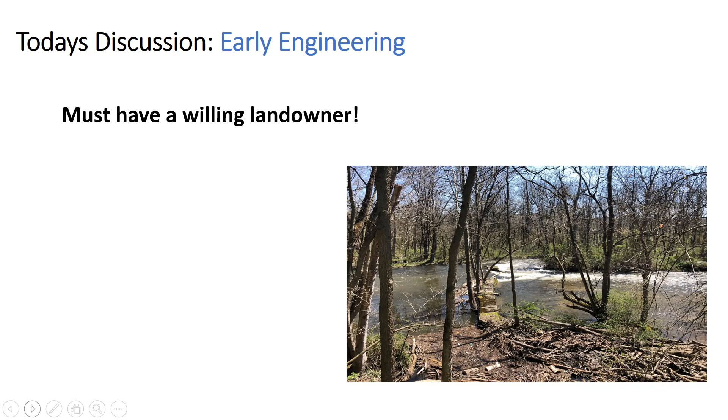Today's discussion, as mentioned, will focus on the early engineering phases of a project. First and foremost, you must have a willing landowner. You can't move forward with any of your projects unless you have a willing landowner that is interested in removal and actually wants you to pursue removal on their property. Some of the big components in the early stages of these projects involve lots of data being collected and lots of field surveys that your engineers will help with. They'll also help perform desktop research, and we'll get into the different components of that research and the surveys today.

I'll give an overview of some of the engineering data that's being collected that feeds into and makes up the engineering design plans. Once we have those engineering design plans, we can get into the permitting process, completing those permit applications. So everything we talk about today builds up to those permit applications and understanding the components that go into them.

I do want to note upfront that not all of these dam removal projects are the same. The actual structures aren't the same size, the amount of sediment behind the dams isn't the same, and where they're located in the landscape isn't the same. So there are nuances to these projects, and I've done my best to highlight where those differences will be, giving a broad understanding of what information is collected and parsing out where, if this, then that, is going to happen. Not all of this information is collected for all removals, but this is a good mix of the big buckets of work expected to happen.

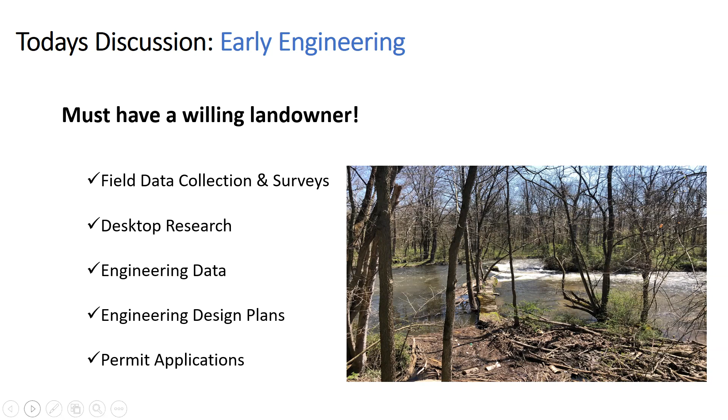So getting started with your project, you have a willing landowner. I always say it's good for you personally to get to know the site and the property, as well as other adjacent property owners in the area. In addition to the engineers knowing the site, it's good for you as the project manager to know it too. The permitting process can be pretty daunting and long, but it's always good to get ahead of it by reaching out to our regulators early and often.

This is very New Jersey centric, so I know there are folks joining from other geographies, but the permits we'll go through today align with New Jersey regulations and rules. A lot of the permitting agencies are pretty similar throughout the states here in the US, but I want to highlight that all the different permits I'll be talking about are Jersey-based. In New Jersey, we have an Office of Permit Coordination, which helps connect you to all the regulators that you may or may not need for your dam removal project.

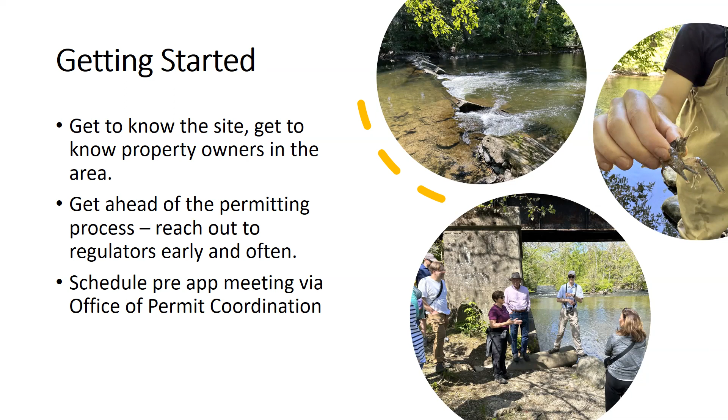So you can get on that schedule and schedule that pre-application meeting as early as a few weeks or a month. Really, you just need some data. We'll get into that in a few slides, what you need for that pre-app meeting, but wanted to note that you can get on that schedule pretty early, and the state of New Jersey makes it very easy because they have a one-stop shop to contact to get on that schedule.

So if applicable, if you have a dam removal that's publicly owned or in the center of a town, something that your engineer can help with is hosting public meetings. It's always good for you, as the project manager, to be there as the relationship builder, but it's also good to have that technical person in a public meeting.

Oftentimes these projects will generate a lot of excitement in the community. And if you have a dam that's in the center of town, you may have folks that have questions about the removal. So it's always good to get ahead of the game and really have your public meeting early on.

Now, if you have a privately owned dam, you wouldn't necessarily need to host a public meeting, but you would be able to connect with the landowners by either door knocking or leaving notices, though it would be on a much smaller scale than a publicly owned dam.

So first up, your engineer is going to have a lot of things to do. This first couple of slides are focused on the field data collection and the different surveys your engineer is going to work on. First and foremost is reaching out to research the deeds.

You can acquire the deeds at the county clerk's office or obtain those public records. And then what you're going to need to do, not you as the project manager, but you as the engineer, is plot the deeds for accuracy in the field.

You can see here roughly what the deeds may look like. Once you have your property boundaries, where you're actually, what the block and lot is, then you need to take it to the next step and start to look at the features in the landscape.

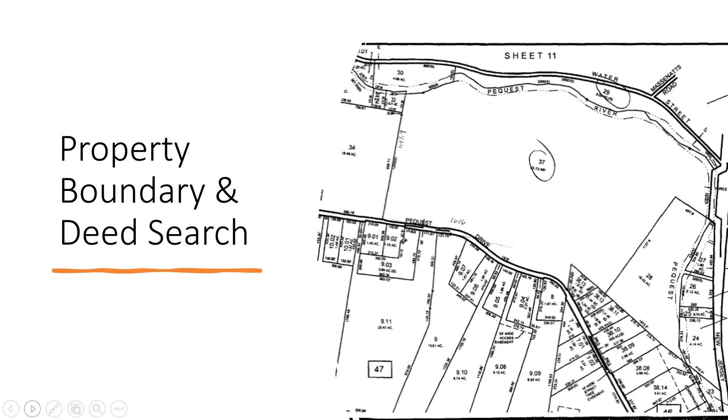Really what your engineer is trying to do is put together your proposed conditions or existing conditions in the landscape. So you document through your topographical surveys, another survey they'll do where they document everything in the landscape - your hills, your buildings, your road crossings, your storm drains. Those topo surveys are where they're plotting all of that on a map.

And then you would take it the next step, looking in the river. Through those bathymetric surveys, this is where they're measuring the depth of the water body, and it allows us to map the underwater features of that water body.

This information can be used for developing those contours of streams and reservoirs. This also allows us to see maybe where the buildup of sediment is on that stream bottom. So really it's just documenting those depths within the channel.

You can see here on the screen, this image I pulled from USGS, which has a ton of information on usgs.gov. This is just one of the fancier ways they collect that information on the contours of the stream, but there are many different ways to collect this data.

I do want to note that if you ever have a question about what your engineer is collecting, just ask them. All of this information I'm presenting today is really going through the things that I've learned through working with engineers on our projects.

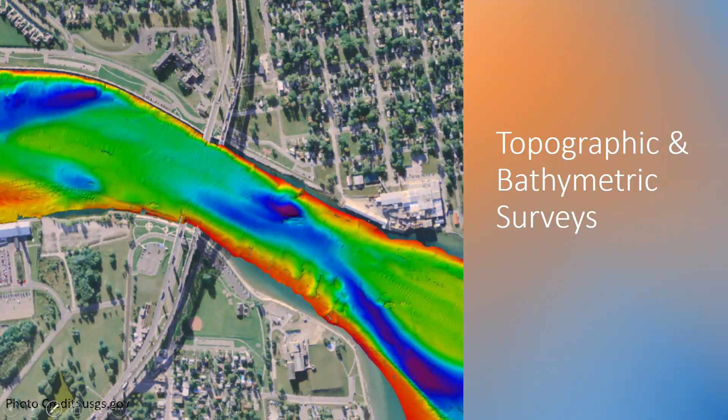It's always good to have the knowledge and information of what they're doing and how they're collecting this information, because some of the things we're going to get into I find to be a little bit more technical and a little harder to understand.

But as a project manager, you always need to present this information to your landowners, right? So having even just that high-level understanding of what a longitudinal profile is, is really helpful. I think the easiest way to think about these longitudinal profiles that are collected is thinking about the river as a whole system.

From the headwaters out to the confluence, we're really trying to understand and put to paper the characteristics of that river system. What the Long Pro allows us to do is see and characterize the average slopes and the different ranges of gradients, the different ranges of pools and scour depths, and the stability of different grade controls.

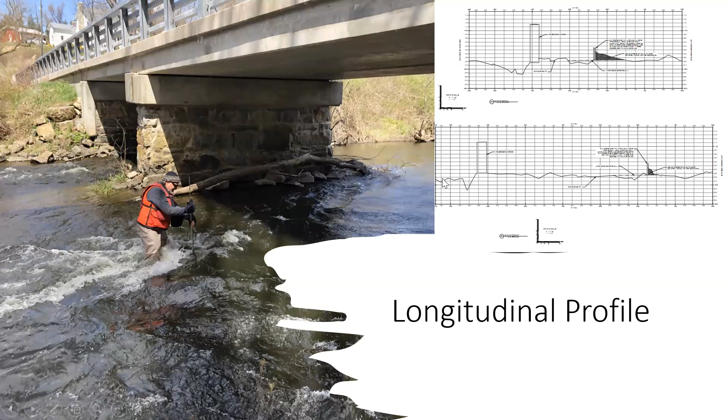They're also going to perform cross-section surveys, and this is what your cross-section will look like on the map. This is a survey that's performed at different portions of your stream reach that you'll be working in. The cross-section survey allows us to determine river flow at these specific transects.

You want to collect this information at points in your survey reach that are representative of that reach. If you have a bridge crossing, or you can see in this photo different channels, you're going to want to make sure that you have a cross section here, where there's going to be different flows. You want to make sure you're representing the flow rate throughout that whole channel, and you can do this via the cross section surveys. The extent of your cross section surveys is very site specific, project specific.

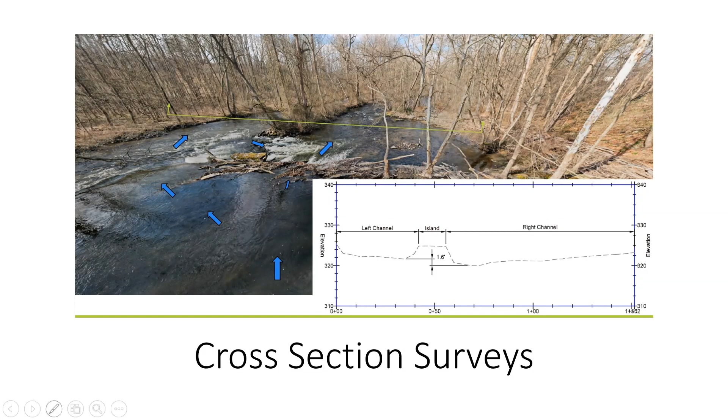Another component of that early field data collection is wetland delineations. In accordance with the Army Corps, they have standards for our wetlands, and it's required through the permitting process to delineate your wetlands. Anywhere you're working that you're going to have equipment, or you're going to be moving things around near a wetland, you need to delineate where those areas are. The wetland delineations determine that boundary between the uplands and the wetlands on that property, and you're following the Army Corps guidelines.

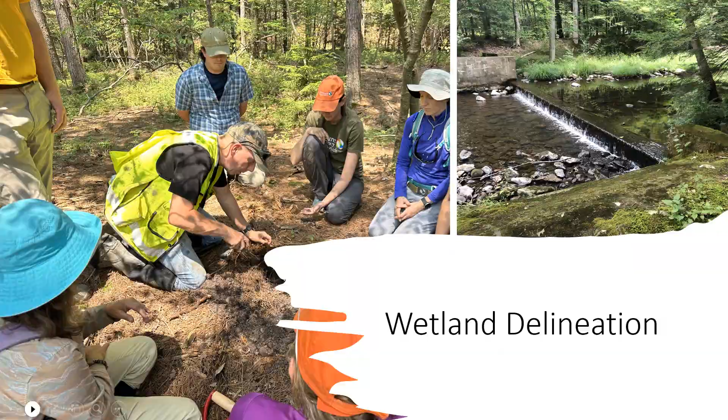Your geomorphic assessment is another piece, and this is where you're looking in the stream at the different pebble sizes. A geomorphic assessment allows us to quantitatively or qualitatively characterize the stream bed substrates within that project area. Sometimes you can do this via a visual assessment. Maybe the dam is pretty small, like you see here on the screen, where you can see the bottom of the river. There's not too much sediment behind. You can see kind of more rocky, coarse grain size pebbles at the bottom.

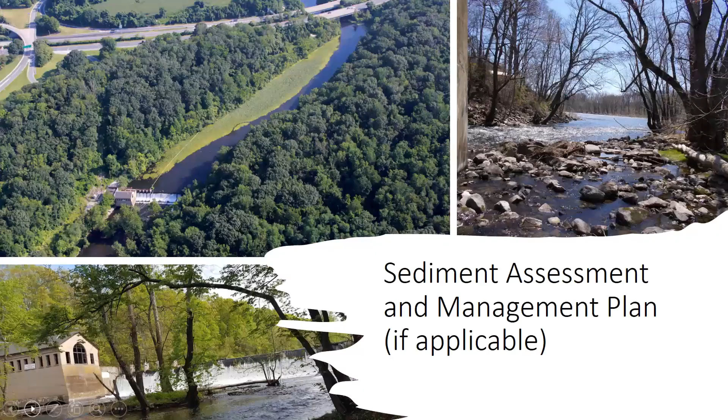But sometimes it might require an actual physical survey of the entire area that's been impounded. If applicable, if necessary, if you have a high amount of fine sediment, you may need to send that out for laboratory analysis of those different grain sizes. You can see here, a dam at this size isn't holding back that much sediment, so you wouldn't be required to collect sediment samples and ship it out. It's really when you have that fine sediment that more regulatory guidelines apply, because really what we're trying to understand is how the sediment behind the dam is going to be flushing downstream post removal.

Here's another image that's maybe a little bit more helpful. You see a dam of this size, this is a front facing view, about 18 feet tall. This had a significant amount of sediment behind the dam, so we had to take sediment samples. They needed to be analyzed to ensure that there were no contaminants, or if there were contaminants.

You are trying to understand the composition and the different particle sizes and what's actually in the sediment. Then you need to assess and figure out how much sediment is behind the dam, and can some of that passively flow downstream to the next river system, or do we need to actively manage that. Sometimes we need to go in and physically remove some of the sediment, and sometimes we can let it passively go downstream. This is all information that will be gathered in these early stages and included in your plan.

So then there is a portion of work that is done via desktop research. There are a number of different web pages with a ton of information we need to assess for fish and wildlife. Specifically, we use a couple of programs: US Fish and Wildlife's IPAC desktop tool, the information for planning and consultation, and New Jersey's specific GeoWeb application. Those two programs have a lot of similar information.

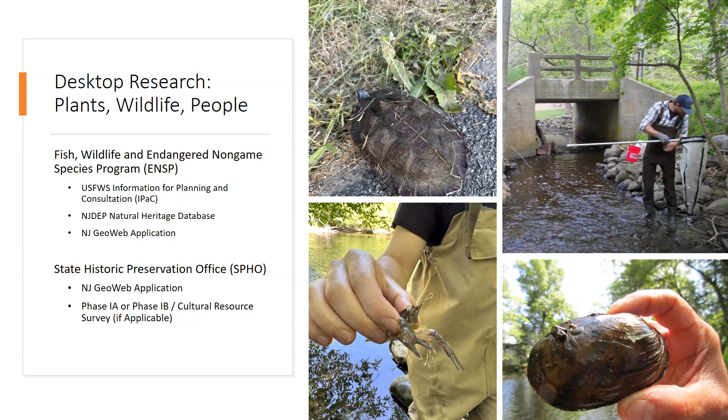Okay, last couple pieces of data: we have what is called the H&H analysis. This is where a lot of the more technical things come into play. Again, I am a project manager, not an engineer, so I'll give you a very high level understanding of what this hydrologic and hydraulic analysis is.

At the highest level, this is just a tool used to identify local benefits of the removal. Through H&H analysis, we're able to identify things like flood reductions. You can see on the map where the river is during current conditions, and where the water goes in this yellow area during a flood condition. This analysis takes into consideration a lot of different components, but most notably, the two big ones are hydrology and hydraulics.

Hydrology, you could think of as hydro, the study of water. It's examining flow duration, flood frequency, and precipitation—how much water is hitting the landscape and then how that water is entering the stream channel. We can look at these hydrological components via different online data sources. I've listed three common ones engineers lean on: USGS's StreamStats and stream gauge data, or flood maps through FEMA's flood insurance studies or insurance rate maps.

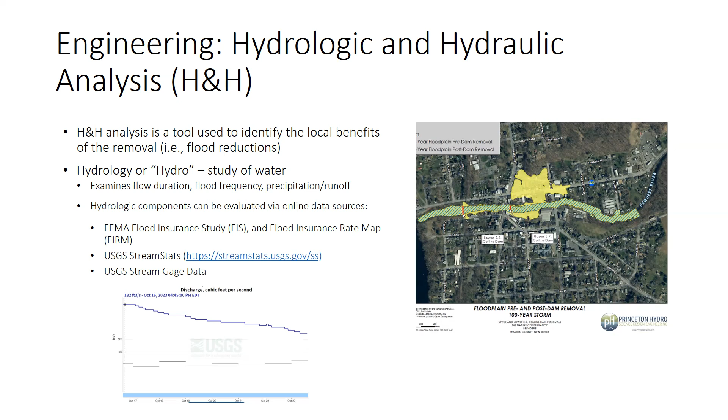So the hydrologic analysis is then coupled with the hydraulic analysis. Hydraulics is really modeling—HEC-RAS might be a familiar term to some, though there are different versions of HEC-RAS. At a high level, it's a model to demonstrate different scenarios pre and post removal. With this model, you can input hydrologic data and really see pre and post conditions—how the water responds in a 10-year, 50-year, or 100-year storm in this particular system.

How is it responding now, and how will it respond post-removal? How will it respond specifically to nearby infrastructure or its connection to floodplains? That's where the exchange of water through the system is really identified and examined through this H&H analysis.

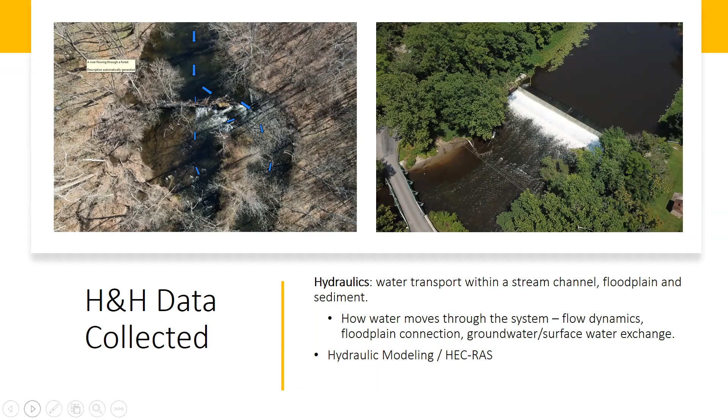One of the things that will come out of that analysis is how it's impacting nearby infrastructure. This is one of those if-applicable situations, because not all dams are the same. Some of the earlier photos you saw were nestled in the woods. Some of our dams are centered in communities or attached to buildings, downstream, or connected to a railroad.

So how is the water going to impact any of the nearby infrastructure post removal? A scour analysis is another thing that will be included in your engineering designs if applicable. You'll have an outline of steps needed - how is it hitting the buildings now, or how is it hitting the abutments of a bridge now, and what sort of scour protection will be needed. Oftentimes it's rock, riprap, boulders to reinforce those structures.

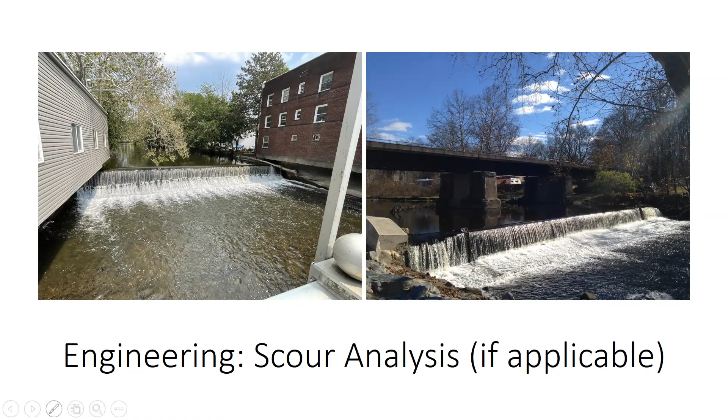The hydrologic model also will allow us to see post removal what those velocities and flows are going to look like through the restored reach. Fish passage assessment is one of the things that can be identified through that process. I think many of us would assume that you remove a dam and fish can swim freely up the channel because there's no longer a physical barrier in the stream. But believe it or not, sometimes we need to do further restoration in-stream work to engineer and design fish passage structures to allow fish to pass.

You often see this when you have a bridge crossing or certain pinch points in the system where the velocities, flows, or depths can be manipulated by nearby infrastructure or different things in the system. So what we need to assess and include in the design plans is whether the target fish species these projects are aiming to restore habitat and connectivity for are able to pass post removal, or do we need to add boulders, weirs, or pools and certain features within that channel to ensure fish can get up to those upstream locations post removal?

We don't want to stress the fish out. We want to make sure they can get up, and there are actually guidelines on specific criteria for our migratory fish and other fish species - the depth criteria or the flow criteria. So we can lean on that information, coupled with the H&H analysis, and determine where and if those fish passage structures are needed.

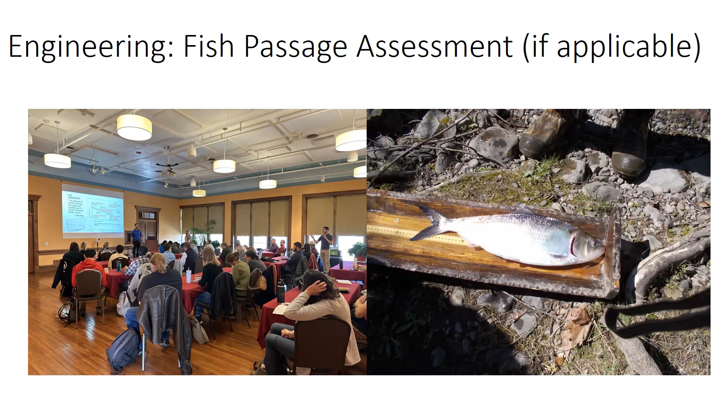Okay, so that was a lot of information summarized in a very short amount of time, but all of that information is eventually going to feed into your design plans. We typically see a couple stages of the design: the conceptual design plans and then a 30% design plan. Those are your first crack at including the topographical surveys and all the information in the field, and really putting everything on a map, understanding those basic current conditions and proposed conditions.

That sort of information is enough to get you to the pre-application meeting with your regulators to go over the general concept or some of the things you're thinking about. In this particular photo, this is showing the staging access. So you can talk to your regulators about these specific components in those pre-app meetings. You can get a little bit of insight from them during that meeting - hey, we'd like to see this, or you should try to avoid that - and they can give you little bits of information about what they're likely going to expect you to do or require as a permit condition.

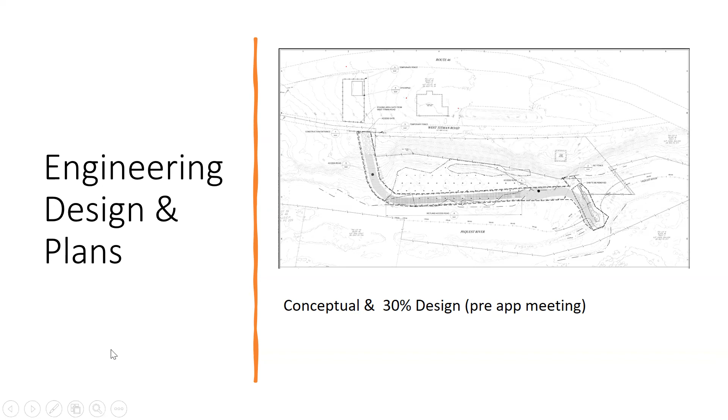After that pre-app meeting, you can then work to fine tune those plans, and come up with what we call the 60% design plan. This is going to include, maybe, that level of detail - this is the staging access, this is the road that's going to be cleared, these are the trees we're clearing to get to the river, this is how much it's going to cost. All of that information collected in the early stages, plus more of the real information like the cost and where we're actually going to access, goes into the 60% design plan. Something else that would be included in that 60% design is post-restoration.

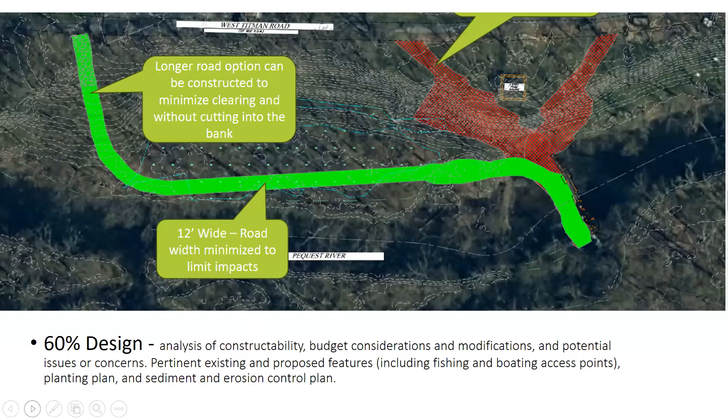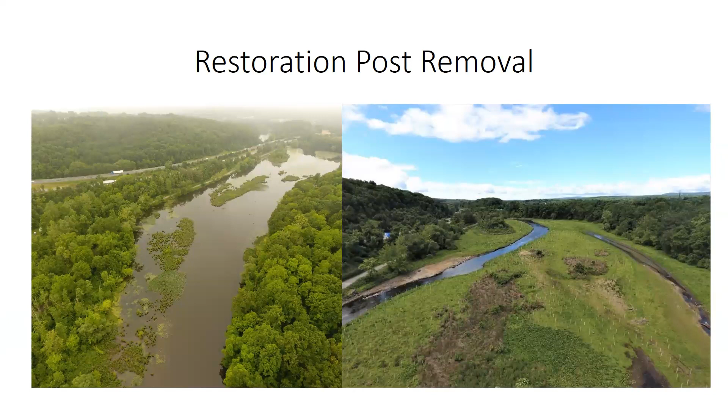So sometimes when we remove the structure, we need to actually go in and replant the floodplain that's newly exposed. This is a before and after you can see here. This particular site had about 35 acres of floodplain, so we needed a very specific planting plan for how many trees, shrubs, versus grasses would be planted.

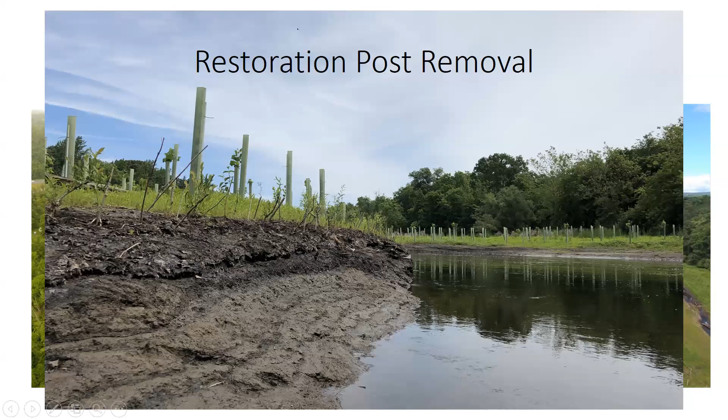All of those details you'd want to include in that 60% design plan to go in with those permit applications—the types of species, where they're going to go, how much it's going to cost, and the timeline for when all of that's going to happen. At that point, you're ready to go into your permit applications with those plans.

The plans are never final until your regulatory agencies give you that final stamp of approval. You can't get to 100% design plans until you speak and connect with your regulators, and you do that through the formal permitting process.

In New Jersey, these are some of the common permits we apply to. You have the Bureau of Dam Safety, for removing the dam—a lot of that engineering and H&H modeling is what they'll be reviewing as part of that permit review. Then our freshwater wetlands general permit 16 and 18, that's through the Division of Land Resource Protection, looking at activities working within a freshwater wetland or transition area, authorizing you to work in that area.

That's where all of that desktop research on the wildlife and species of concern, if any, or your cultural resources—all of that information will be reviewed as part of this permit.

You also have the soil erosion and sediment control plan. That's a certificate that usually goes through the Upper Delaware Conservation District for New Jersey in the Delaware—really through your soil and erosion conservation service, whatever one's in your area.

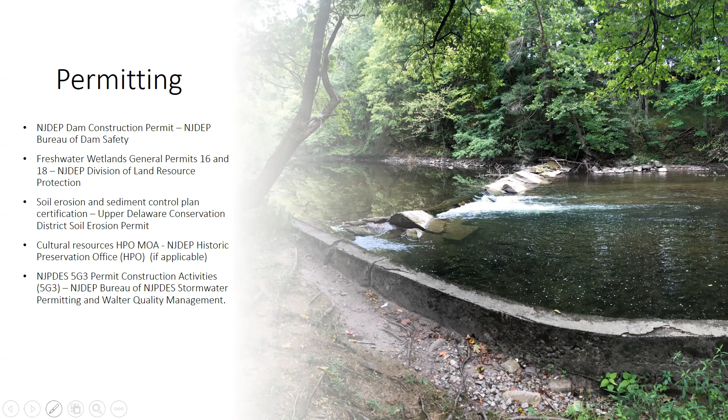The cultural resources review isn't a formal permit application, but you'll get comments back from the HPO, or Historic Preservation Office, during those pre-app meetings. If applicable, you'd obtain a separate MOA for that, and your construction activities would require a permit as well. There may be others—this is just a high-level look at some of the common ones we apply to.

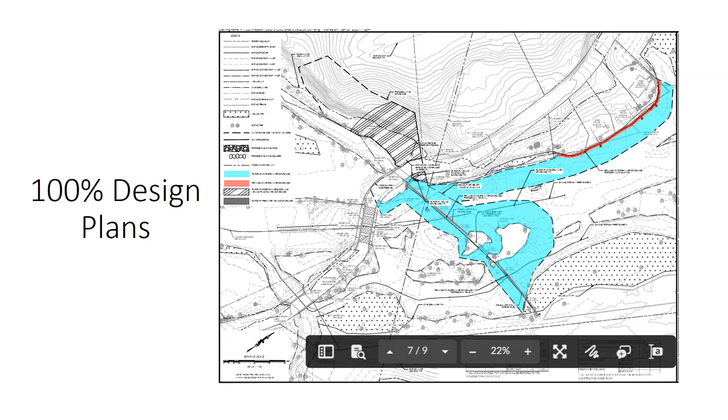Once you go through the permitting process, you come out with 100% design plans, which include every aspect of your project: your staging area, where the rocks are going to go, where the trucks are going to move in the system, the block and lots you're working on. All those details go into your 100% design plans.

Those are the plans that will come up with your technical specs, and you can then take those plans and actually contract out the work.